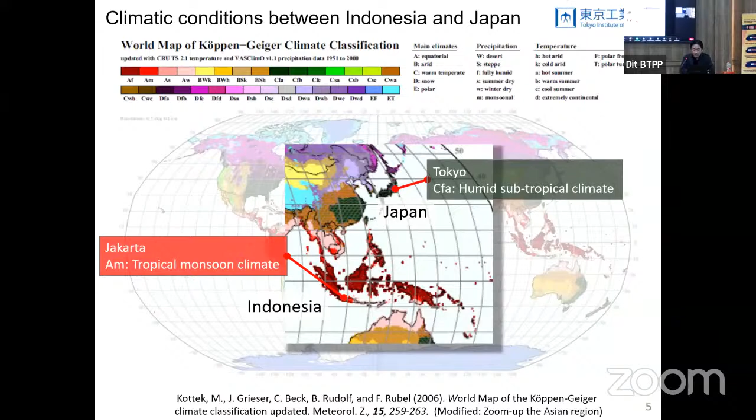This time I cannot compare many cities, so I'll simply compare Tokyo and Jakarta, very big mega cities. Jakarta is a tropical monsoon climate in this Köppen climate classification map, and Tokyo is a humid subtropical climate, which means it has very hot summers.

So I think we can greatly share information between Indonesia and Japan. This is the reason why I recently got involved in the project in Indonesia—how can we exchange data and knowledge between the cities and countries?

In view of the urban environment at very large scales, one of my research fields is remote sensing—how can we understand the actual condition of heat in the summer environment in cities and surroundings, using a satellite, aircraft, or sometimes a helicopter?

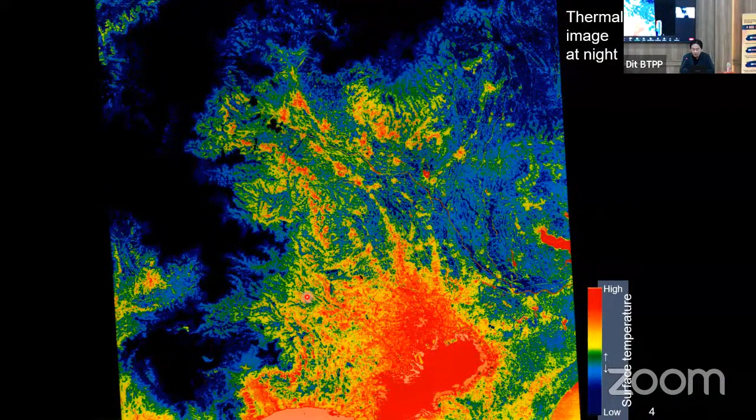We need to take care of such things. So one of the general ideas is how to consider such heat problems and how to mitigate such heat conditions, not only for the building itself, but also for the urban environment and surrounding buildings, by planting trees or something. The temperature of Tokyo is, of course, largely dependent on the regional climate.

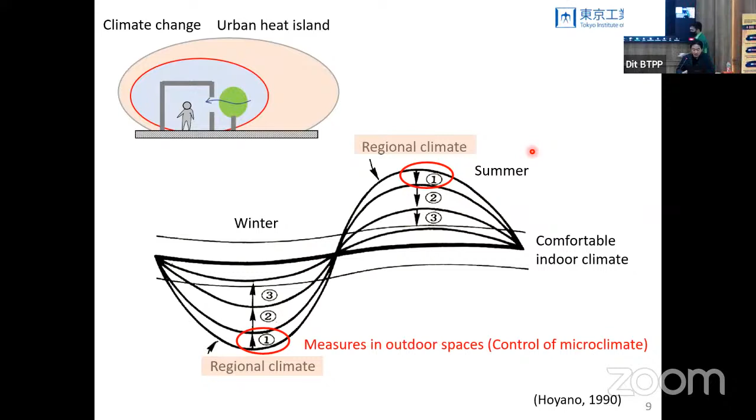Regional climate differs between cities - of course, Jakarta, Tokyo, or Jakarta and Bandung. Regional climates are largely different among cities. So sometimes it's hot and sometimes a bit cool. If there are very hot conditions or a hot summer like Tokyo or Jakarta, we need...

...to mitigate the heat in outdoor spaces like this one by planting trees or providing air flow, wind, or something. This is what we call control of microclimate. The surrounding environment is very important.

So I feel a very positive impression of Indonesian countries, especially in Bandung. They have many trees and they can mitigate the heat or bring nice air. This is what I feel is ideal - I think ideal. So yes, you can already achieve this one.

The second one is building performance, building design and performance. Next, you need to consider how you bring fresh air into the building inside, and how to keep the building performance for summer comfort inside buildings while also reducing energy use. Finally, you can control the indoor environment - temperature, humidity and such things - by mechanical equipment. So these steps 1 to 3 are very important.

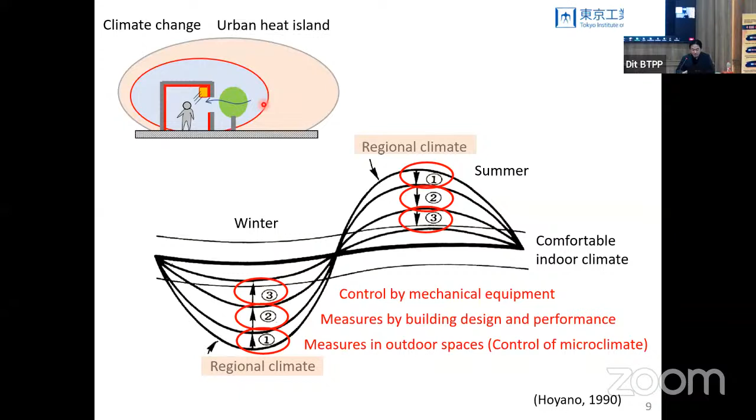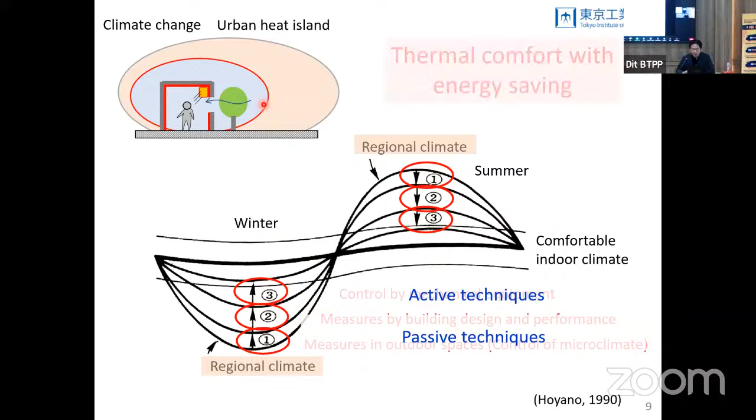The first two are called passive techniques - in hot seasons we call them passive cooling techniques. The third one is active techniques, using mechanical equipment like air conditioning systems. By considering steps 1 and 2 in the design processes, you can achieve thermal comfort with energy saving. This means please don't think of active techniques first - please consider these passive techniques first, then finally apply active techniques, and you can achieve less energy use.

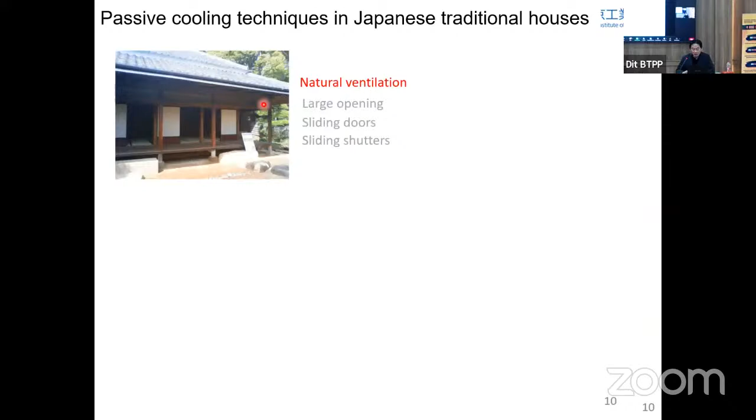Okay, so this is the Japanese case. Traditional Japanese houses were originally equipped with passive designs: natural ventilation, solar shading, and evaporative cooling while sprinkling water outside to provide coolness to the outside and inside. Also, thermal storage materials, for example the ground - the soil can store coolness. We call this thermal storage. Radiant cooling effect can also be achieved by earth floor and earth wall.

And finally, this is a very traditional Japanese lifestyle - we have a lifestyle and behavior that adapts to hot environments during summer seasons. Sometimes we forget such things, but yes, we have very nice traditions. I understand the Indonesian situation is almost similar - Indonesia has very nice traditions, nice buildings and nice environments. So yes, we need to respect such things.

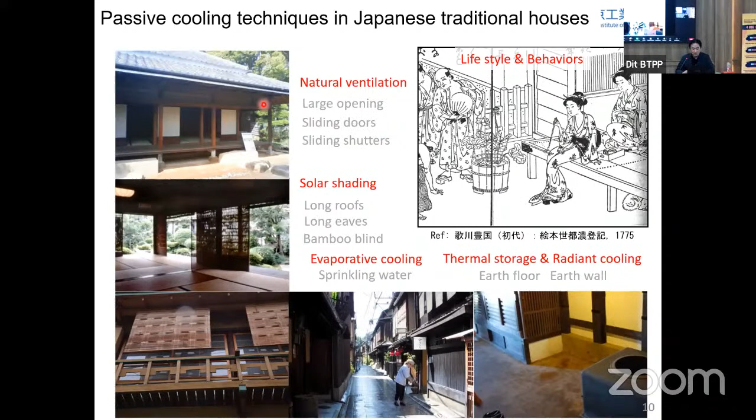But now we need to consider how we should act now and how we should act next. Not only thinking of former years, but also understanding the current situations and how we can achieve such passive designs in modern houses, contemporary houses, by combining them.

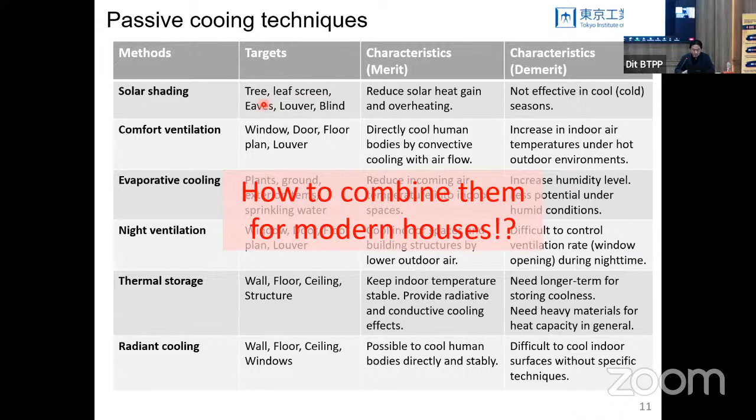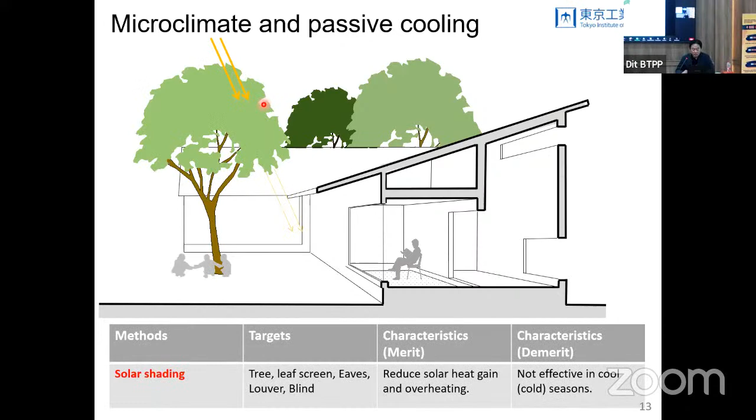But the important thing is the general idea and principles. Solar shading by trees is what we need to consider first. Shading is important in hot environments, along with bringing comfort air from outside. This is what we call comfort ventilation. Cross ventilation and stack ventilation can be applied even in hot environments.

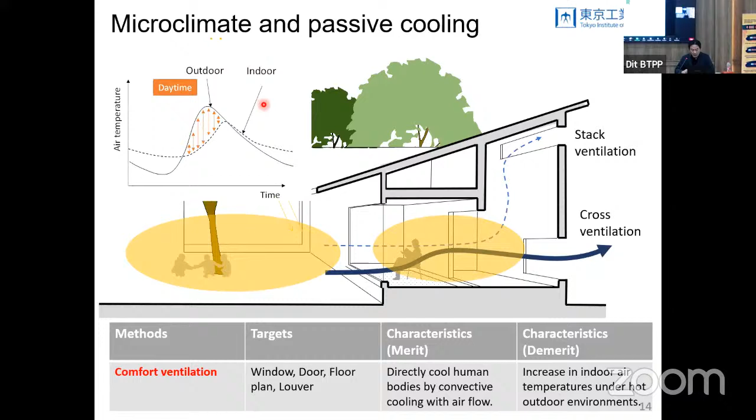If the outdoor temperature is over 30 or 35 degrees Celsius, we can mitigate such heat by evaporative cooling techniques. Water evaporation can remove heat through latent heat, and that can provide cool air into indoor spaces.

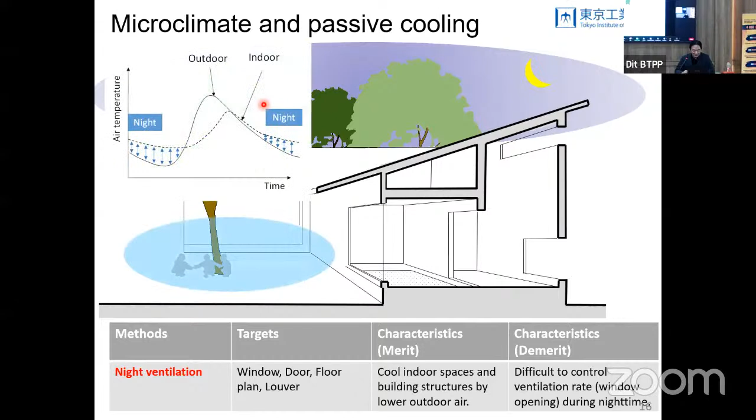During nighttime, we can enjoy very cool temperatures. So during nighttime, we can have much lower temperatures, and this lower temperature can be stored into the building structures, materials, and so on.

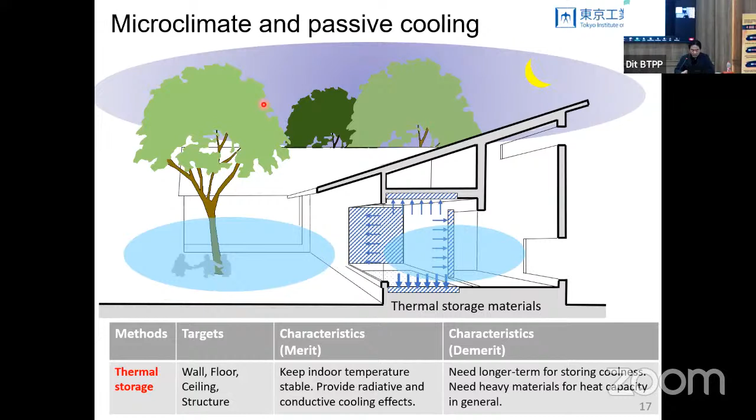This is what we call cool storage or night purge. If the building has such thermal storage performance, we can store this coolness for the next daytime. This means that if outdoor temperature becomes higher, we can close the windows and still feel the coolness, as long as thermal storage is in place.

So these are the very general ideas of what we need to consider, and the important points for thermal comfort with less energy by applying passive cooling designs.

Okay, so the next point is case studies in residential houses. How do we apply passive cooling techniques to Japanese traditional houses? This is a collaborative research project with the housing company Misawa Homes.

This is one of my collaboration partners in Japan. They also understand the Indonesian cases. For this case study, I have several examples where we collaborate with housing companies, but this is one of the very interesting situations.

The interesting situation is that this is one of the hottest cities in Japan. How to adapt to such a hot environment is a very big issue, and the local government considers these things. They say that although this is the hottest city, it's also one of the most comfortable cities. So being hot is not seen as a negative point - they changed their mindset to see it as a positive, asking how to mitigate it and attract people to the city.

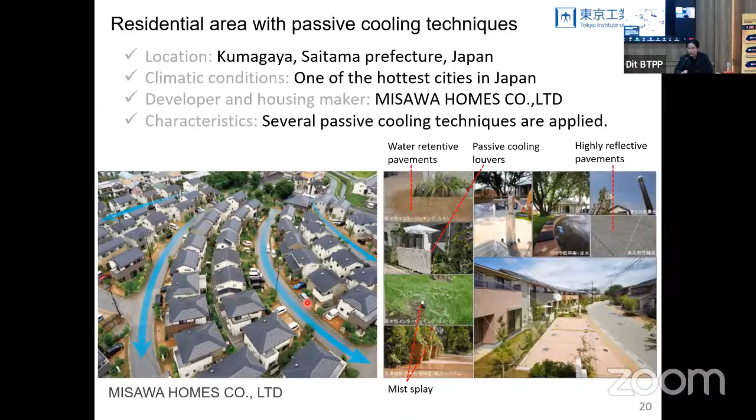But there are PV panels, photovoltaic power generation panels, on the rooftops. They are afraid that trees would cover the PV panels, so they select PVs for energy generation instead. But I think this is a very big issue - how to combine trees and PVs in residential houses, especially detached houses.

What we do is experiment at this house. Of course we discussed this during the design stages, but after they built these areas, we check how it works, how the performance can be achieved, and so on.

So what we do is compare situations with passive cooling techniques and without passive cooling techniques, and how it cools the space - veranda, terrace, or indoor spaces. Later I will explain the simulation optimization using simulations. The experiment and simulation are both very important - not only the experiment, but also the simulation. Both combined are quite important.

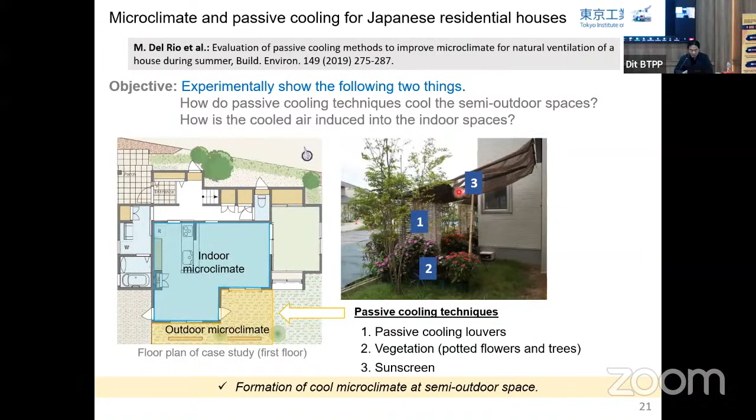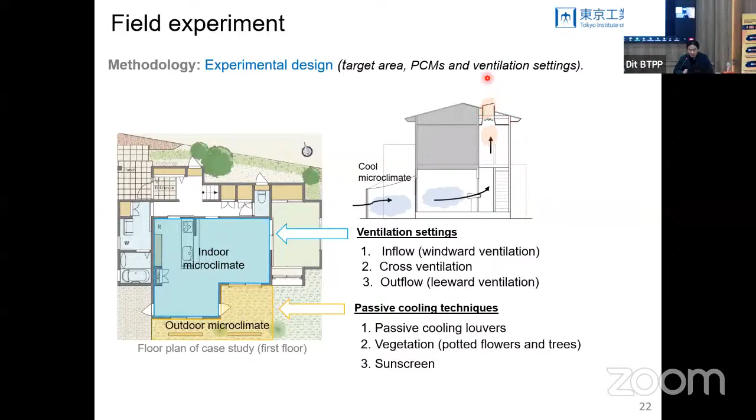First, we check the performance of these passive cooling techniques in one of these residential houses - there are passive cooling louvers, vegetation, and screens like this one. You can easily understand how outdoor cooled air comes into the indoor space, and how heated air is removed from the top windows like this one. You can see how the wind comes in, how it cools in the outdoor spaces, how it's induced into the indoor spaces, and how it's released through high side windows or top windows.

Okay, so this is passive cooling louvers developed by Misawa Homes, and we check the performance at this site. Yes, you can see this is dry

louvers without watering, and this is the wet louvers, wet PC louvers. So water drops from the top of these louvers, and then goes down by gravity, but it can smoothly spread the water on the louver surfaces. Then all surfaces are fully cooled.

You can see the temperature of these louvers is very close to wet bulb temperature. Wet bulb temperature is the minimum temperature that can be reached by evaporation, so reaching the wet bulb temperature is a very important point. And also this is the dry ones. You can see the very big temperature differences between them.

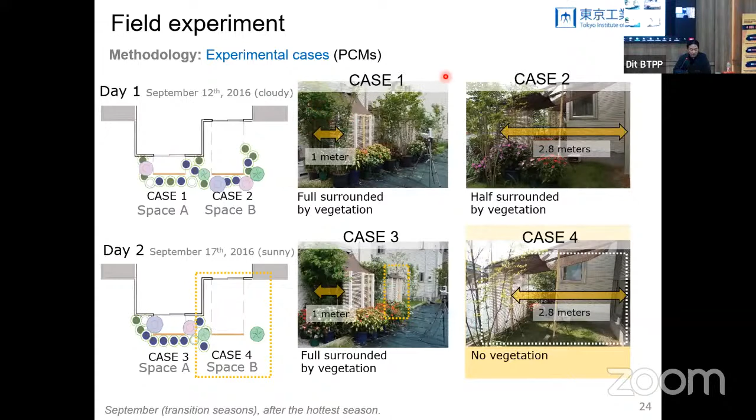We also check temperature in different cases, though I won't explain in detail this time. What we check is the difference in temperature of the terrace and terrace space with different louver positions - louver distance from the window to the louvers, like 1 meter and 2.8 meters - or the surrounding vegetation condition: fully surrounded by vegetation, half surrounded by vegetation, and no vegetation, to see how it changes. Case 1 and case 2 are cloudy days, and case 3 and case 4 are sunny days.

So you can see that when the louver is in a position very close to the window, the temperature of this terrace space is lowered by these passive cooling louvers. In the case surrounded by vegetation, temperature reduction can also be achieved - temperature is cooled in the semi-outdoor space.

But as you can see, the cooled air is very heavy, so it goes down and accumulates near ground level. This is important - cooled air goes down. This is the same situation. And this is a sunny day.

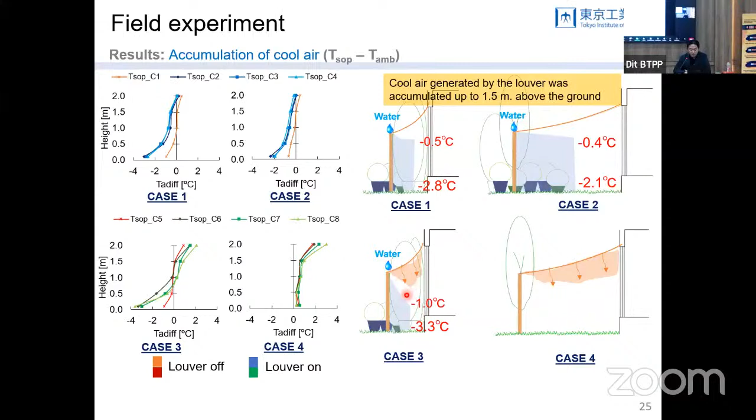So there is a screen to make shade, but there is heat coming to the screen, and it reduces the cooling effect - this means it heats this space. Also with long distance, heated by screen and no vegetation, this is the worst case - no cooling can be obtained here.

So it seems like very similar designs - louvers, vegetation and screens - but their performance is quite different. So we need to check such sensitive differences in the performance of the passive cooling effect.

We also check other situations like this one. If the louver and window distance is very close, cooled air can go into the indoor space. But if the louver and window position is far, around 2.8 meters, it doesn't reach because the cooled air goes down, and it's heated by screens - it's not good.

So we understand such design should affect the performance. So what is the best combination of them, and what is the best performance for indoor thermal comfort?

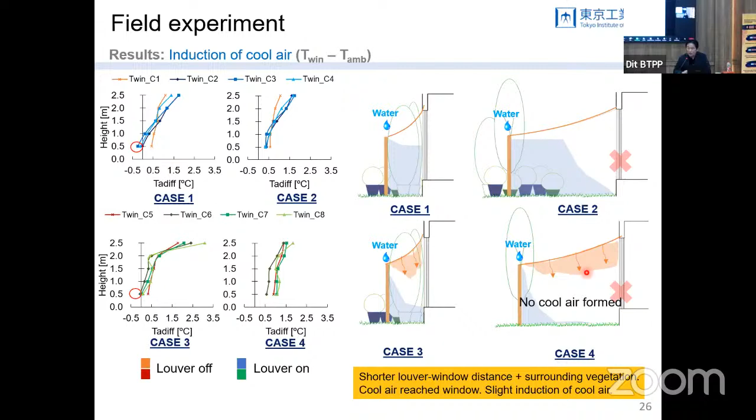There is a limitation in experiment and measurement - a limited number of sensors, limited cost and time-consuming processes. In that case, CFD computational simulation, like CFD simulation or energy simulation, is a very important technique that can

compensate for the limitation of the experiment. Also, the very powerful point of simulation is that it can be applied to the optimization process, optimization of designs. So if you change the design of the house or outdoor spaces and summer performance, you can check which one is the best, most influential, and which are less influential, and then get the best designs by using computer

simulations. So in this process, we apply the optimum combination of passive cooling techniques and passive cooling designs for buildings by using simulations,

like this one. And if you have knowledge of CFD simulations, in many cases CFD is focusing on either the outdoor space only or indoor space only. The indoor and outdoor are separated, completely separated. So this is a very general CFD simulation technique.

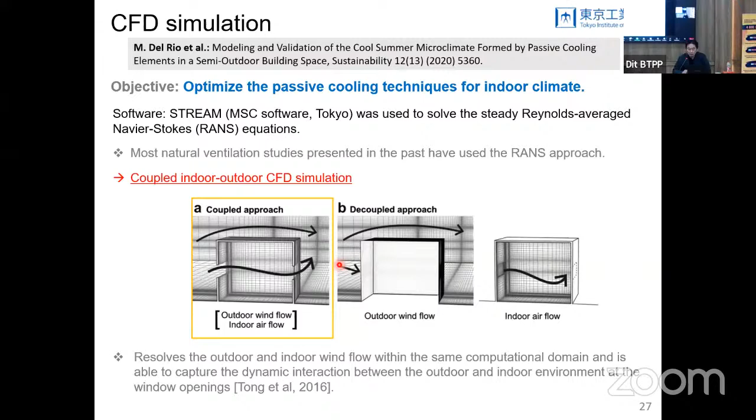indoor summer conditions and summer comfort. This coupled approach is what we apply this time. And these are the calculation conditions.

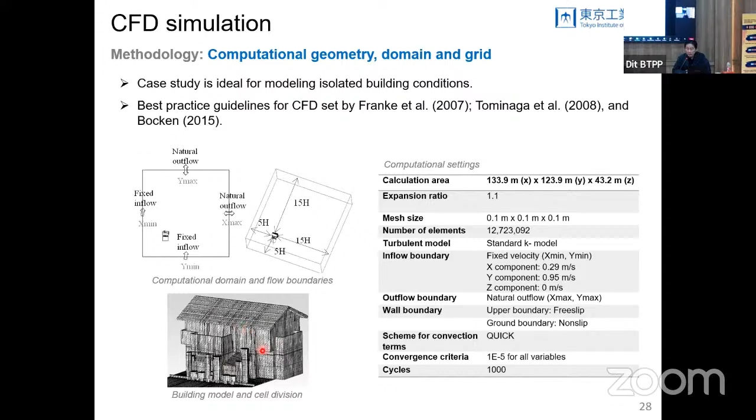I won't explain too much in detail, but we can have a very fine, very small grid to completely reproduce the design of the building and vegetation and so on in the computer. So, I think your question is, okay, is this simulation accurate?

Is simulation valid for checking such a summer performance of buildings? So this is what we call the validation process. Validation is checking whether this simulation is valid or not. So for the validation process, we can compare the measurement and simulations.

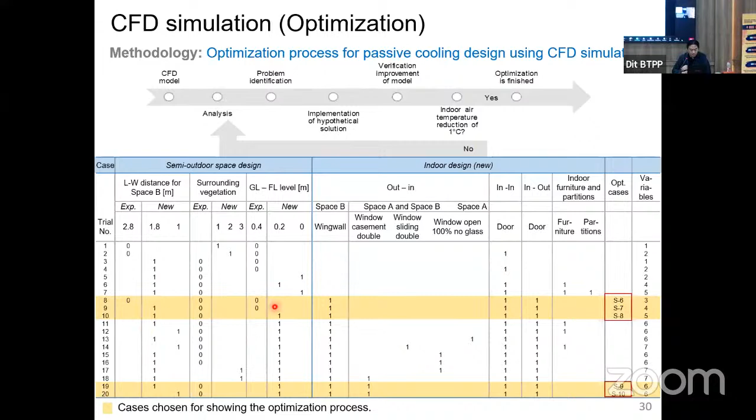And also the design of the building, the facade walls, the wing wall, and the type of windows are also quite influential, as I will explain later. Next, the window design and how the door of indoor opens or closes, such conditions, and indoor furniture and partition conditions, and so on. I will try - these are the 20 cases we tried, but today I will explain some of them. I think you can easily understand by checking these figures.

And the result - I'll show you the simulation result for each case. The first one is the original case, no change from the current design. So you can see this is the louvers and the vegetations, and here you can see the indoor spaces are a bit higher temperature this time, over 28 degrees Celsius.

I forgot to explain that this is not the midsummer season, but the late summer season. So I think outdoor temperature sometimes reaches 30 degrees or a bit less than 30 degrees. But we can see how the temperature can be reduced by passive cooling techniques. So in these seasons, it is quite important to apply passive cooling techniques.

So once the indoors are heated, they use the air conditioning system. Of course, in the very mid-summer season, we are largely dependent on air conditioning systems - this is the hottest cities. So in that case, air conditioning is needed, but in late summer season, the condition of indoor and outdoor spaces largely affects the selection of opening windows or using air conditioning. So it's very sensitive, and it's very important to apply passive cooling technique.

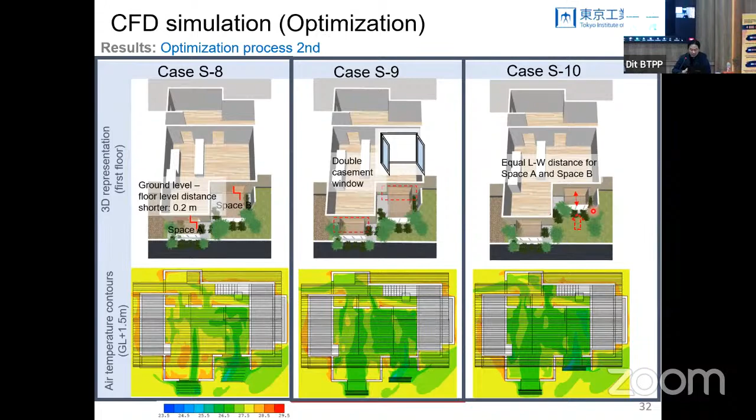So this is S10, and for S10 we also check the thermal comfort of indoor spaces, how people can achieve thermal comfort. As you can see, the indoor air temperature can be reduced by 1.2 to 1.6 degrees Celsius from the original case to the final case, so 1.2 to 1.6 degrees cooler.

But what is surprising is the thermal comfort reduction. The reduction of SET star is minus 2.5 degrees Celsius. The thermal comfort index SET star is the index showing how people feel coolness based on air temperature, humidity, wind speed, and radiation. Overall, people feel 2.5 degrees cooler than in the original case.

So it's easy to understand from these two cases. This is our final, optimum case for the passive cooling design. But I explained that this 1 meter louver distance may be too short for actual use of outdoor spaces, so this is a discussion with designers about which is best.

So you select either more performance on thermal environment and thermal comfort, or a wider outdoor space. If we show this result to residents, they can understand, oh, this position is okay, this position is not okay.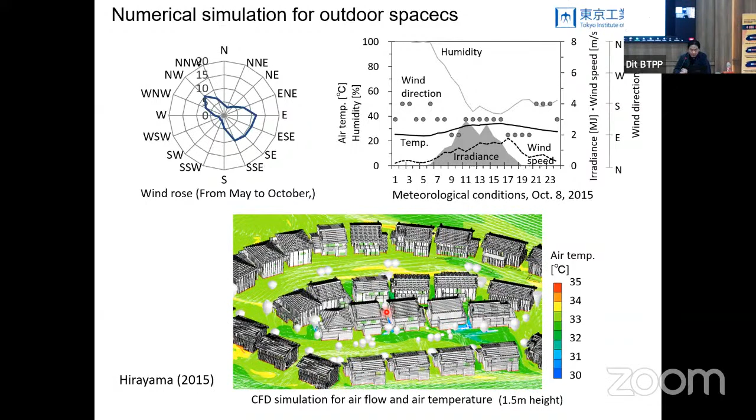And also in outdoor spaces we can check this. Later I will show this. I will explain the simulation tools for outdoor spaces, for example what kind of layout of passive cooling louvers provides more coolness in outdoor spaces, using such district scale, larger scale simulation tools, not only single buildings.

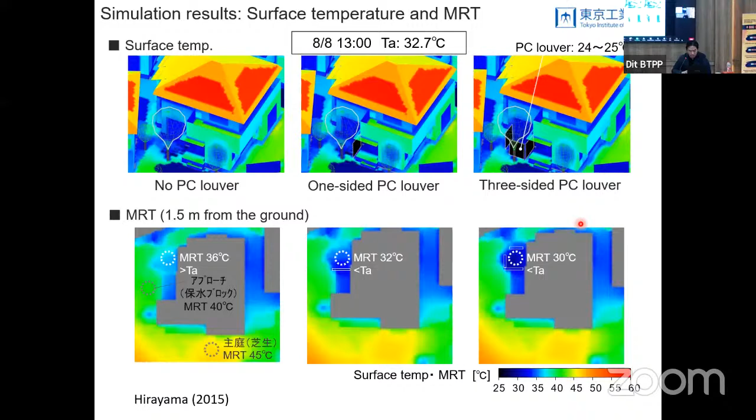The mean radiant temperature is one index for the radiation environment in summer. Summer radiation is very important for summer comfort—how it can be reduced by passive cooling louvers—and air temperature changes, and finally the summer comfort index, how it can be reduced by outdoor space designs and passive cooling techniques. This simulation is conducted for the summer season.

As you remember, in the hottest cities, outdoor space use is less and less due to hotter conditions outdoors. But by providing such passive cooling techniques, this SET star from 30 to 32.5 degrees Celsius is the summer acceptable range, not quite full summer comfort—people cannot feel fully comfortable, but this is also acceptable.

So by using numerical simulations, we can understand indoor summer comfort and building design, and also outdoor designs. This is what I titled this lecture: simulation-based design.

What I need to tell you is that the designers and housing makers selected this one-sided option. In view of summer performances, we think this is best, though it is too much enclosed for the residents, so one-sided is selected. This is a discussion point, so no problem, but we can provide such evidence and data.

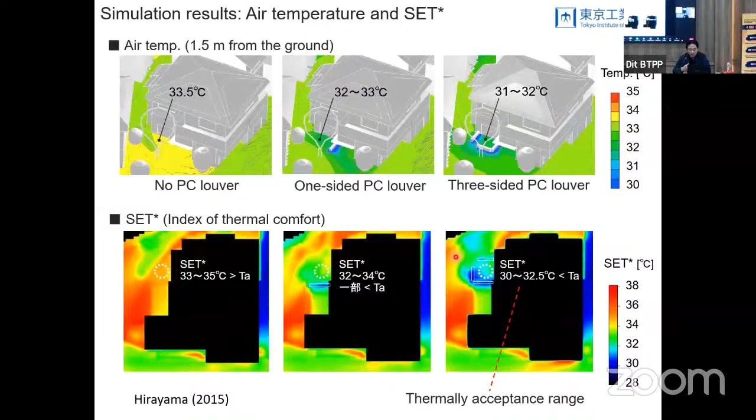Finally, I'd like to explain the larger scales, urban environment, urban summer environment. I think this is closer to governmental and official public works, how the building and urban spaces are designed.

Related to urban planning, urban design, and landscape design, we also developed a system that can check the summer performance and summer comfort of urban district scales by using 3D modeling techniques and simulations. Firstly, 3D modeling of urban districts and summer environment simulation will be discussed.

There are different types of simulation techniques, like surface temperature and radiation environment simulation. Surface temperature includes ground temperature, building wall temperature, and roof temperature. These are very important information for the summer comfort of outdoor spaces, whether heated, cooled, or shaded by trees, and how ground temperature affects human summer stress and comfort. Research shows that very high surface temperature areas mean very bad summer radiation conditions, causing heat stroke.

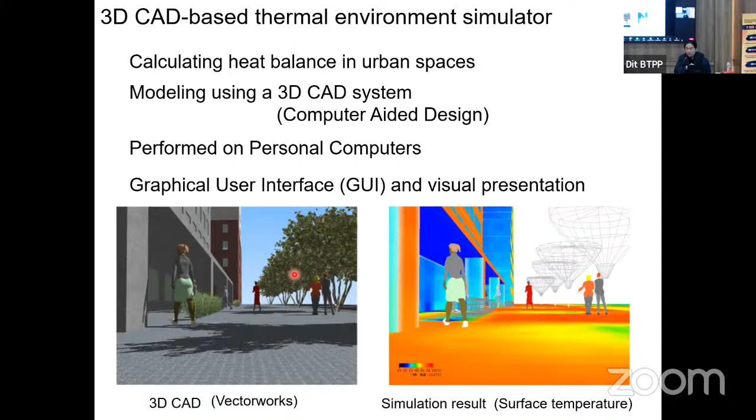For 3D modeling, what we do is apply 3D CAD modeling systems for buildings and urban spaces. By using 3D modeling, we can change the designs of buildings and materials, change the greens and green species, and simulate how this changes the thermal environment, especially surface temperature. This simulation can be performed on laptop computers, letting us understand how building and tree design changes surface temperature.

Computer-aided design, CAD, is very popular I think in Indonesia. By using computer-aided design, we can do this in the design stages and planning stages.

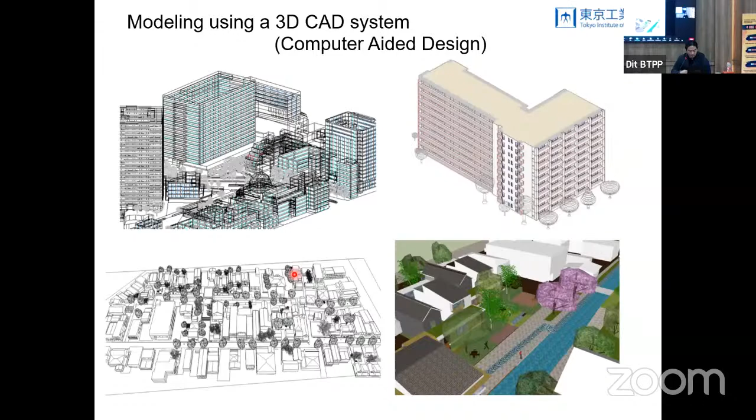As you can see, the buildings, walls, and roofs receive direct solar radiation and sky solar radiation, reflected solar radiation, and exchange long wave radiation with the sky and surroundings. These radiation exchanges can be totally simulated by these simulation models with 3D buildings.

We can extend this simulation to the district scale, like this one, which is for a middle-sized or maybe a bit smaller city, using 3D CAD models like this one.

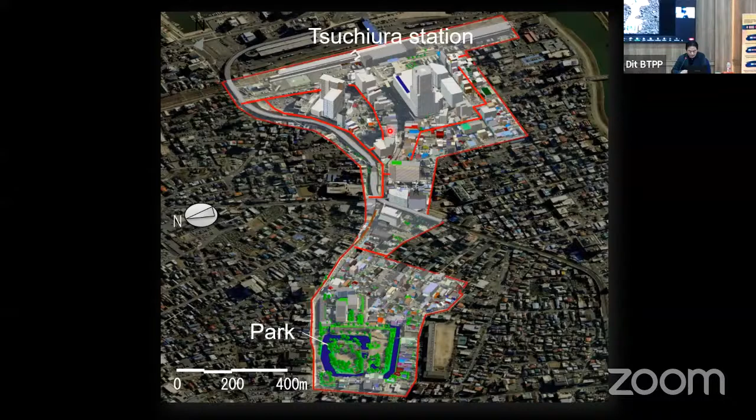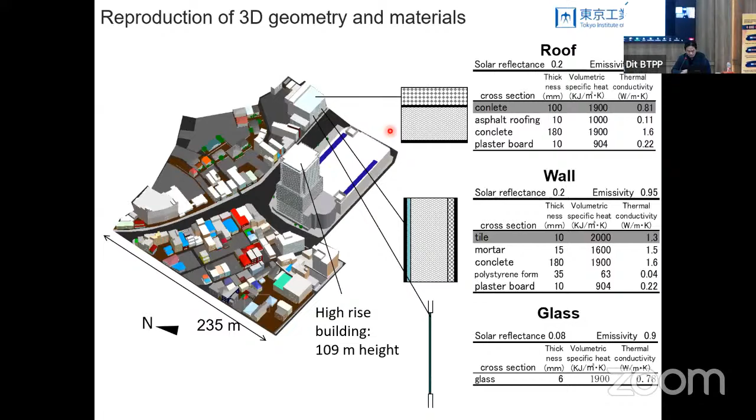We also put in the materials, which are very necessary to simulate building performance and thermal environment of urban spaces, including roof materials, wall materials, glass, and ground. These materials can be put into the simulation model, and then you can see the surface temperature of the urban district scales.

This applies to summer seasons and winter seasons. As you can see, there are high-rise buildings that provide shade to the surroundings, and differences in surface temperature between roof materials, and there are parks which provide shade and cool the surface temperature of the area. You can see the surface temperature differences and distributions using these simulation models.

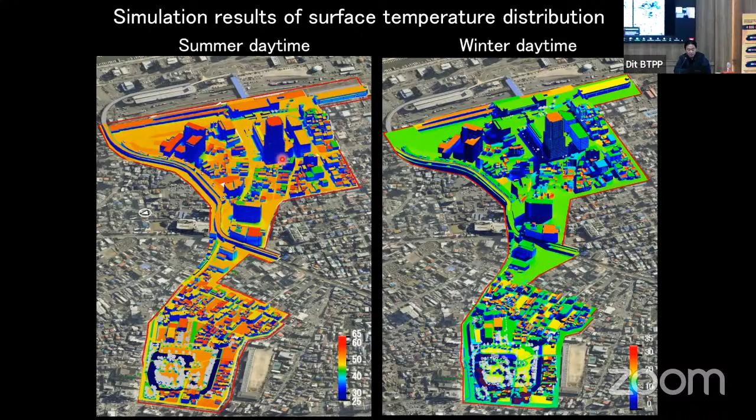Do you remember that? So for simulations, validation is important. So how do we validate this simulation result at district scales?

Yes, we use remote sensing data from an airplane. We fly the airplane with cameras, and check the surface temperature from the aircraft from 500 meters. Like this one, this is a city, this is the central city area, and also this is a land cover map.

Obtained by remote sensing. Remote sensing uses camera sensors that can completely check the thermal conditions and surface materials and so on from 500 meters.

Resolution means how detailed we can see each building and ground material, and it's around 0.6 meter resolution, so this is enough to check the details of ground levels and building shapes. We conducted the remote sensing observation for daytime and evening time.

So we compared remote sensing observation and numerical simulations. You can see the shade effect of buildings, the surface temperature and the difference in surface temperature between building types can be, not perfectly, but accurately reproduced.

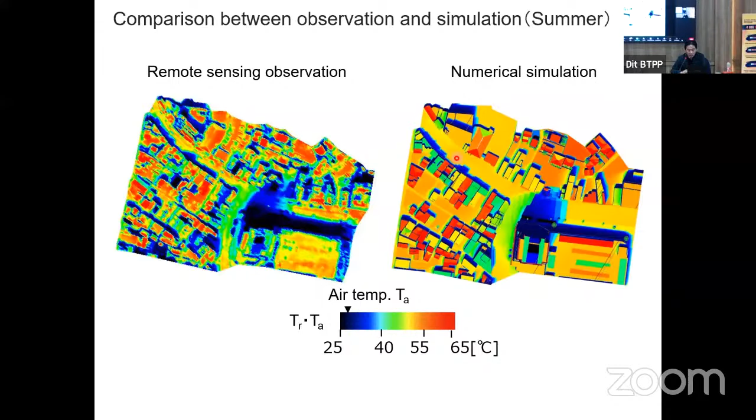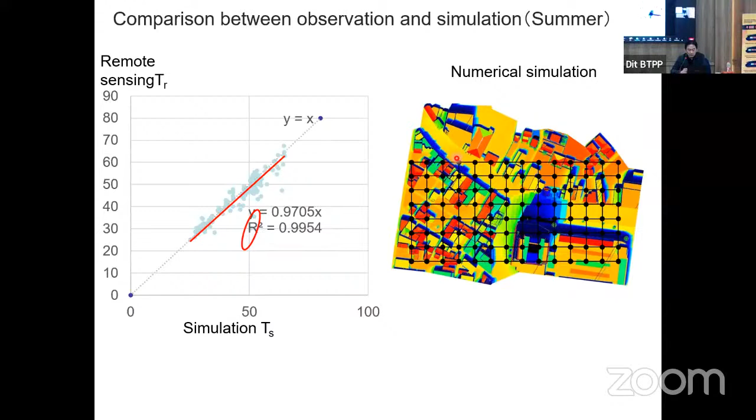We selected over 100 points to check the surface temperature between the remote sensing and the numerical simulations. You can see there is a very big correlation, a good correlation between them.

This is also the winter case. There is shade here from a high-rise building, so there is a very big shade. This simulation can also reproduce such a shading effect from big trees and tall buildings. We can see these are quite nice performance in the simulations.

There is a very good correlation between them. So we can validate the simulation result this way. We conducted this for summer and winter seasons to check the difference between the simulation and the actual conditions by remote sensing techniques.

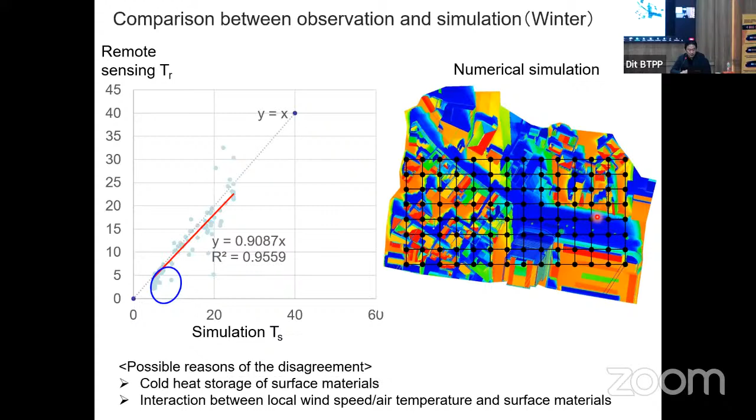So we can simulate the full area of an urban district, from central areas and parks to commercialized or residential areas. Now I pick up one of the residential areas, this one.

Now I pick up only here. This is the simulation result of the current situation. There are roofs and these are parking lots. This is a simulation result of the summer daytime around noon.

In hot seasons, air temperature is about 33 degrees Celsius, a very hot condition. As you can see, the surface temperature of the roofs of the residential houses is much higher, and also the asphalt pavement provided for parking lots is also higher.

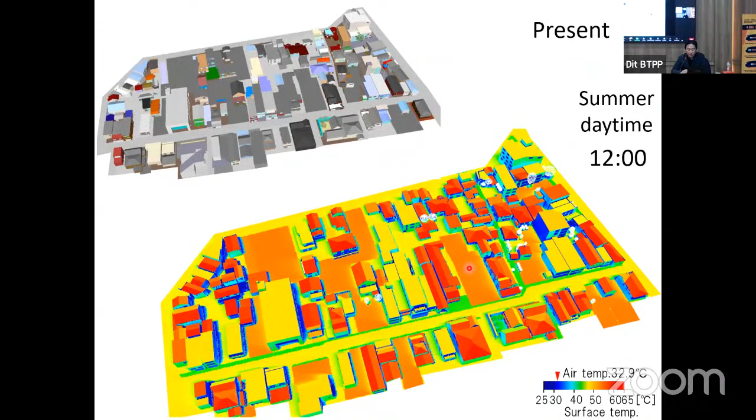So what is the powerful point here is that we can change the design of this urban district. For example, if you want to understand the effect of trees, or how to consider the effect of historical materials versus more modern materials, or something like that.

Like this channel, one of the historical heritages of this area, but now it originally covered this stream. The water stream is covered, but how would it change if you open this stream heritage?

How to apply more low environmental load, low energy buildings, how this works can be simulated. This is one of the images.

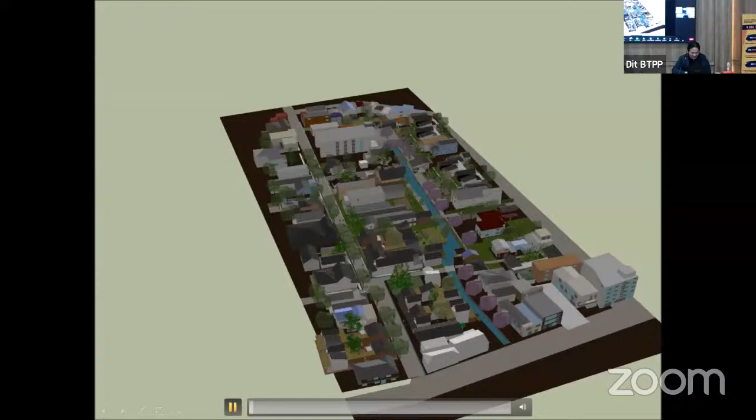I cannot see, I'm sorry, I cannot push the button. Okay, I'll skip this one. So if you change... this is just, now I can make it, okay. Now I stop the laser pointer. If I use the laser pointer I cannot push this button. Okay, now it's okay, now it's okay.

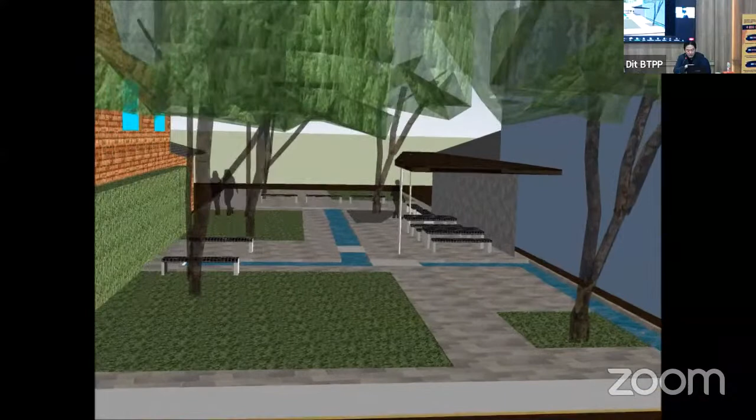So how it changes, how it happens when we produce a better design with trees and make the open space more comfortable, not parking lots, but providing more useful and comfortable outdoor open spaces with a channel stream, the water stream, and greens and so on.

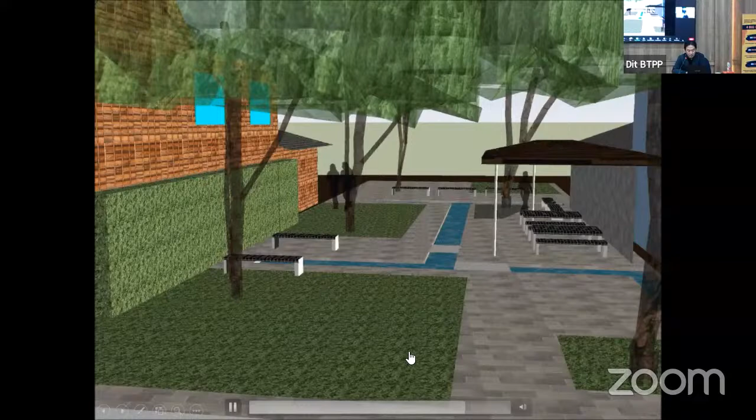By using 3D CAD systems, we can design and view the townscape and the design of buildings. The important thing is we can check the performance in terms of thermal environment and thermal comfort, how it changes, how it affects the summer environment.

If you achieve the future image in 2050, like this one, honestly, this is only an image, we haven't achieved this yet. But what I need to say is we can share the image of the future, what is changed, how to change these areas, how to keep and preserve the current heritage and current cultures and current urban areas, and what is preserved versus what is changed.

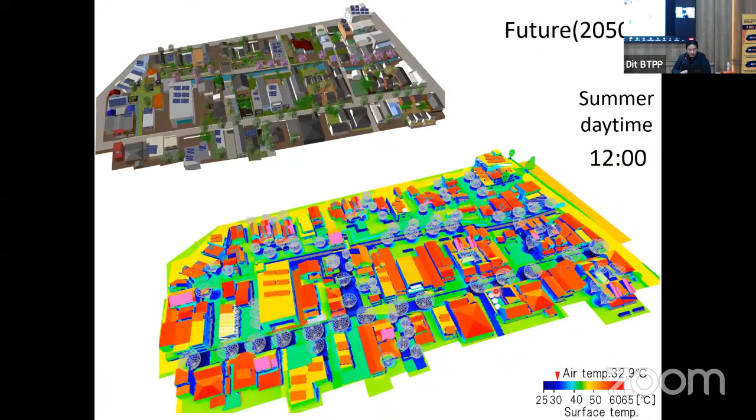And that thermal environment can also be simulated. For example, with parking lots currently - I don't deny parking lots are important, but this area has less and less people now, so too much parking is not needed. Most urban spaces can instead be provided for the comfort of people.

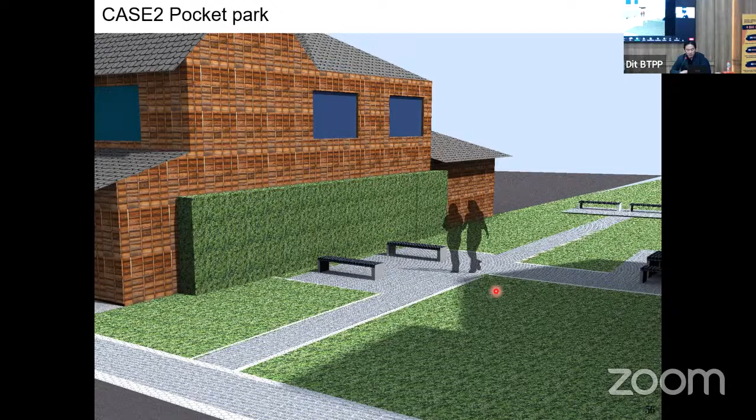This is just a very general pocket park in Japan, like this one, with grass but no big trees - big trees are not so popular in Japan compared to Indonesia. But I love big trees and the good shading and environment they provide for people.

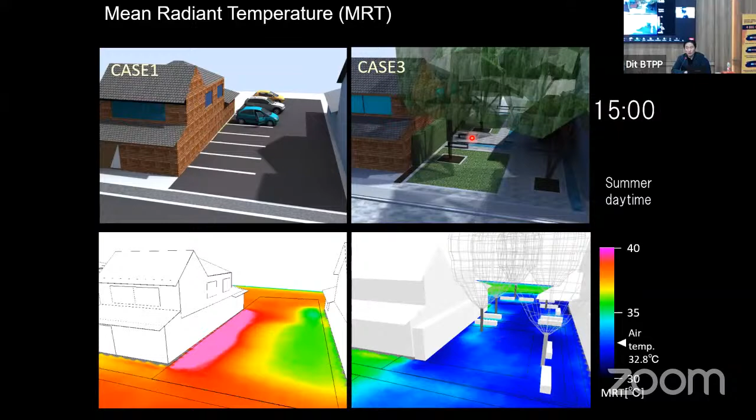With green design, you can provide areas like this and change the summer environment. This is the index of mean radiant temperature, a thermal radiation index, and we can calculate thermal comfort as I explained before. The thermal comfort can be dramatically changed from a hot environment to a cool one, not only by changing the design but also by changing the performance of the space.

PV panels can also be put on rooftops to provide energy to buildings. As I explained, the layout of PV panels and greens is a difficult problem. So we check how to place roofs, trees and PV panels so that the panels are not covered by greens, but instead shade is made for the open space and street space.

We also check the performance of the building - sorry, I forgot to put in one slide. This is a somewhat old building, so we check how changing the building materials, adding insulation, and changing building equipment like air conditioning, lighting, hot water supply, and kitchen appliances affects performance.

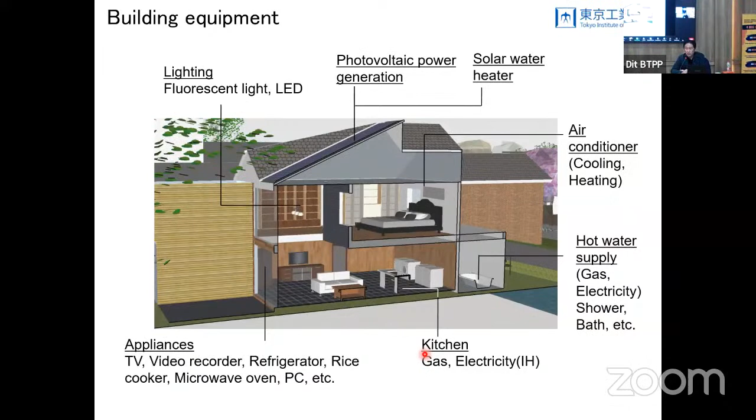Finally, we can check the effect of outdoor spaces, building performance, and building equipment on energy consumption, like this. We can achieve an 83% reduction by combining outdoor space design, building performance, and building equipment. This was all completed in simulations.

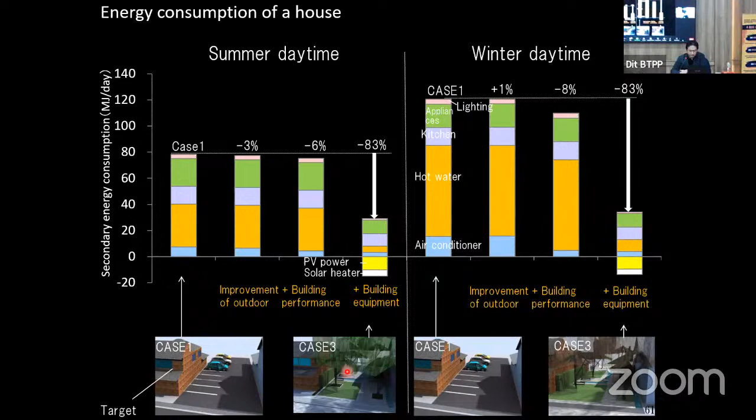So as you can understand, we can now connect building design and outdoor space design with building performance in view of comfort and energy. Time is a bit limited, though.

So the final part: I'll discuss a current project I've joined, an actual application of this kind of simulation to urban space design with thermal comfort. I already told Ariel-san about this project - Marunouchi Street Park is a very interesting and attractive project in Japan.

What is attractive is that this urban street park is not an original park - it's a street in normal days. But during a summer event, all cars are shut out, and it provides open space temporarily, like this. They put greens and lawns on the ground, benches and desks, to provide good open spaces.

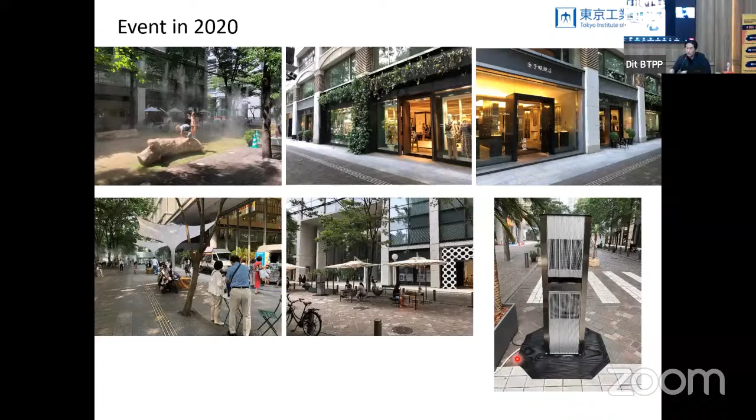What's surprising is this isn't in a suburban area but in the center of Tokyo, in front of Tokyo Station. There's a space like this for pedestrians, office workers, shoppers, and children to enjoy. This is Tokyo Station, and in front of it there's a street provided as a comfortable open space during summer season.

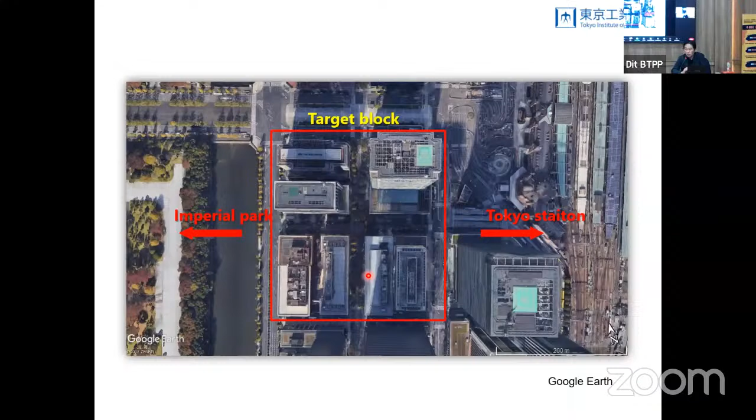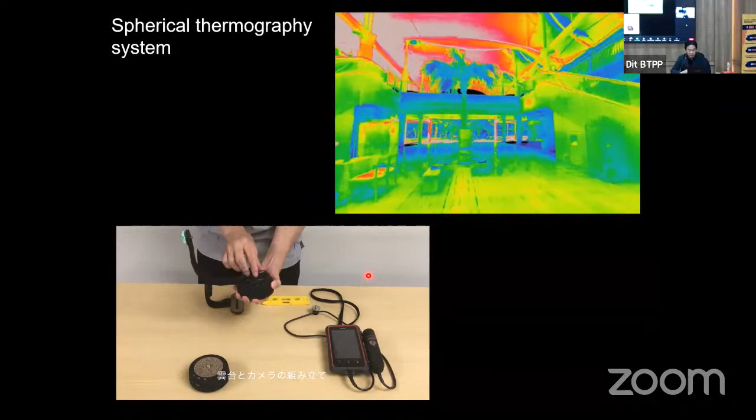We checked how this event, conducted during summer season, achieves summer comfort through passive cooling techniques, using measurement and simulation. I won't explain too much today given limited time, but we checked summer performance using this spherical thermography developed by our laboratory, which shows the summer performance of buildings and urban spaces in terms of surface temperatures.

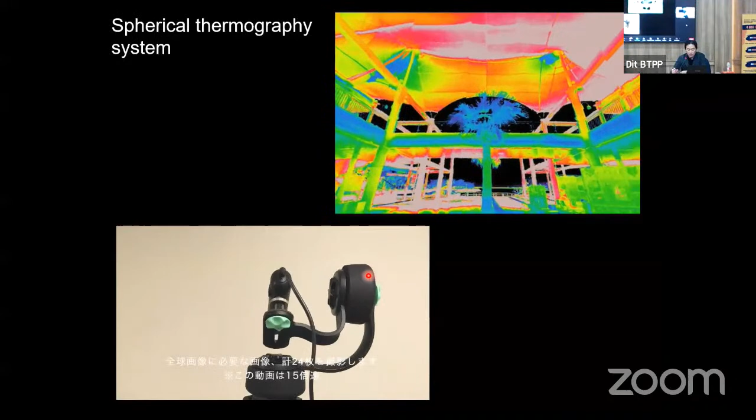As I explained before, the surface temperature is very important. The 360-degree surface temperature for this area can be captured by this system.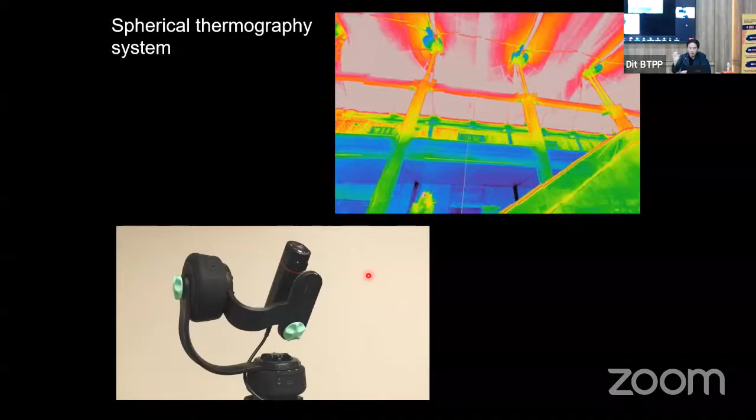We check the performance for summer conditions for each of the spaces like this one. This is only one parasol shading, but this is not enough, so this is not good. Next, we remove this one and try the next change. I'm not the designer and I'm not the planner, so the decision is theirs, but we can provide the data. This is not good, so they don't select this one.

Trees are okay. The surface temperature is lower and can provide coolness. This is the best point - very good tree crowns and canopies, and also lawn grasses, or sometimes water retaining pavement with evaporated material. We can create coolness here.

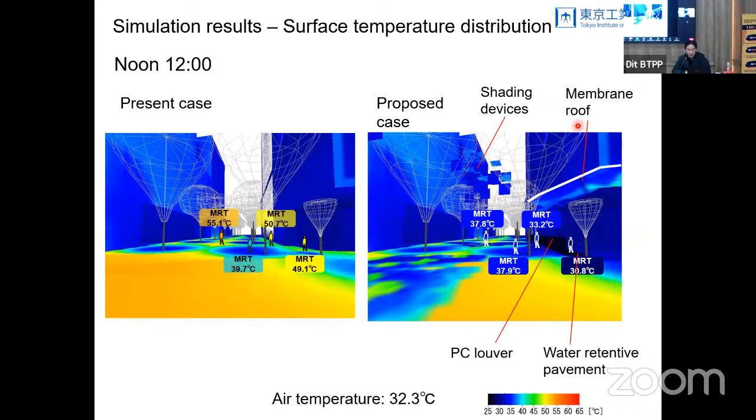Also, with simulations we can check the effect of different designs and different passive cooling items on the surface temperature and summer comfort. As I explained, passive cooling louvers, water retentive pavement, shading devices, or membrane roofs. Shading devices - how they work on wind speed, air temperature, mean radiant temperature, surface temperature, standard new effective temperature, and summer comfort.

This is the present case, and this is applying the passive cooling techniques as I explained. By applying them, we can achieve summer comfort here. This is not very stressful for people, and they can achieve summer comfort even in very hot summer seasons.

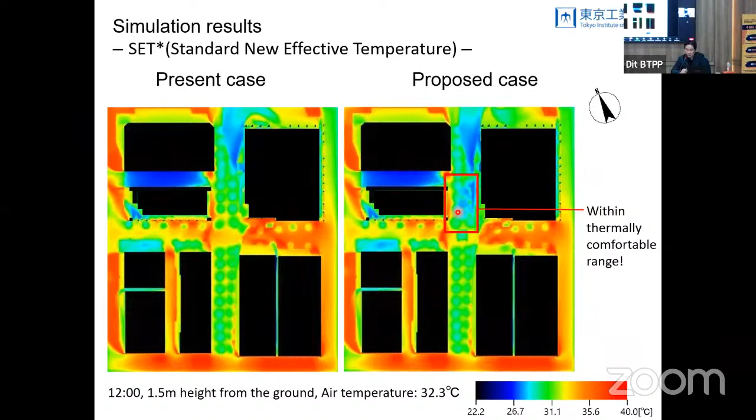Because the Japanese summer is very hot and getting hotter. This year, the surface air temperature is about over 35 degrees Celsius at maximum. This is very hot conditions, but people can use this space with comfort.

The management company of this area and local government decided to increase the furniture and desks or something to provide good spaces because people can feel coolness. This is enough for their resting, working, playing ping pong, or even good sleep.

This is not traditional in Japan - traditionally Japanese people don't use outdoor spaces too much. But now we can use this space because after the pandemic with Corona, we need to use more outdoor open spaces with fresh air. We can release the stress from very hard working. So at this time, this kind of space is important.

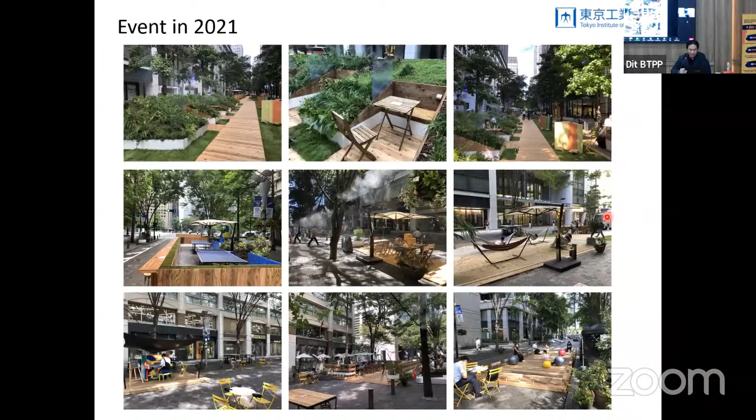Finally, we check by questionnaire how people feel comfort or coolness in the space. During hot seasons, people can feel cool and slightly cool in this space, and also slightly comfortable. We made a questionnaire here, and 80% of people can feel the coolness.

Over 80% of people who use this space can feel comfortable, so this is very important. If you provide such furniture or desks across the street and provide the spaces, but if they don't use the space, it's too much cost, effort, and time consuming. So we need to decide whether this is okay or not - for people using the space, yes, this is okay.

So we can use this space and utilize it more. The design changes year by year and gets better and better now.

I think this is the final slide, for numerical simulations. Now the Japanese government also considers the application of numerical simulation - how to evaluate energy, structure, or transportation systems based on 3D models. This is a very attractive project now, provided by the Japanese government, Ministry of Land, Infrastructure, Transport and Tourism. This is a total 3D model of Japan, and this is open data that we can use.

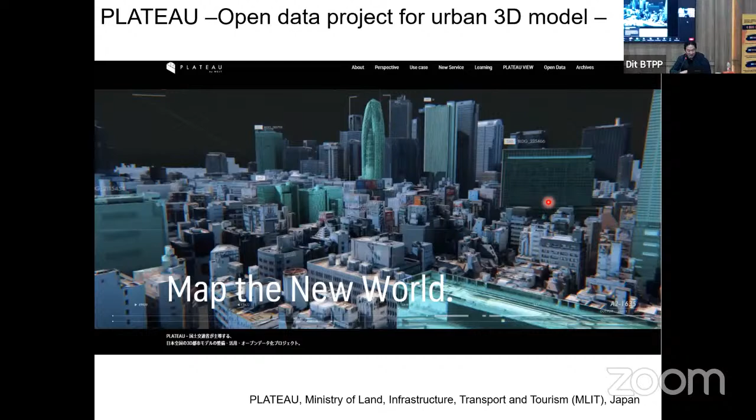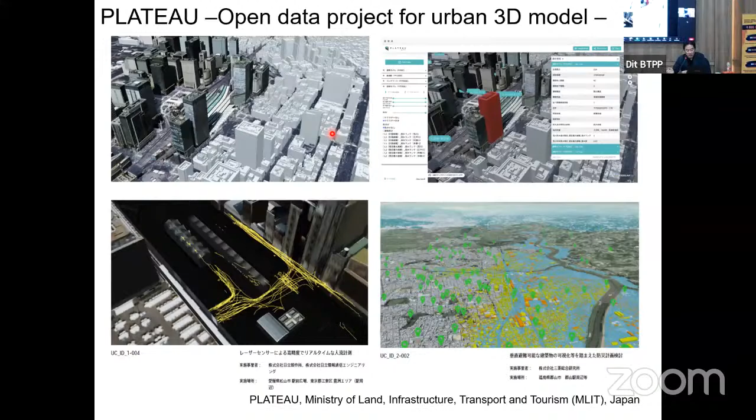Honestly, previously we made 3D models of areas by ourselves, and it took my students very hard work to make these models. But that's not needed now, because they originally provide a totally 3D model of urban centers like Tokyo, or suburban areas, or other cities like this one, which we can utilize for simulation models.

Now we apply these open 3D models to the simulations, but right now it's a very simple model we apply. The Japanese government is increasing building design detail levels like this - LOD 1 is a very simple model, and LOD 4 is a very detailed model.

So if they can provide more detailed data, yes, we can use them for simulation, not only the surface thermal conditions and thermal environment, but also energy simulations. I think in the near future we can do this.

Okay, I'll skip these since time is over. I think this is 60 minutes for my presentation. So today I talked about these topics, which are from one of my research projects, trying to collaborate with companies and local and national government to achieve thermal comfort and less energy use through simulations.

This is still in progress now. We can't yet achieve 100% in the practical phase—about 50% is research phase and 50% is practical phase. So how to achieve this kind of simulation-based design in practical situations, collaborating with designers, local government people, and stakeholders, is I think a very important next step. I want to discuss this with you as well.

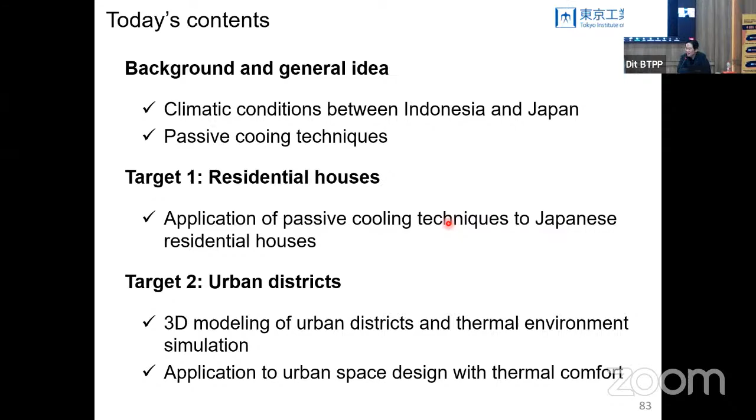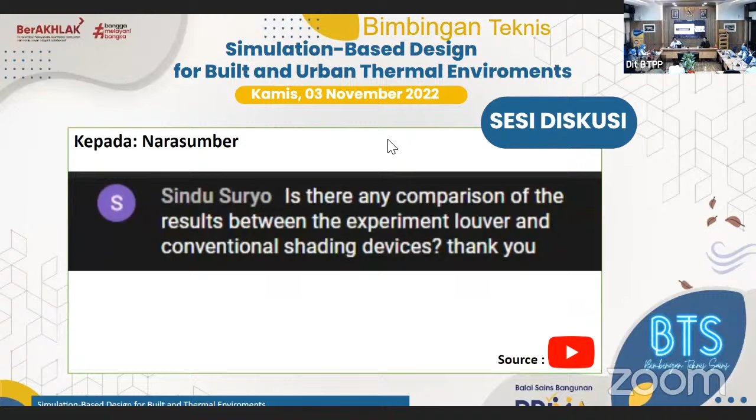Okay, so we have five questions: from Inat, Fani, Neti. But from Neti, sorry, I forgot to interpret, she asked about in your simulation you only present about the pivot windows. She asked: do you have any other research to investigate other types of windows? Because as you may know, this type of window takes so much space when open or closed. But with minimized space, still improving the indoor thermal environment. Thank you.

So first question is from Inat-san about the validation process, what we change if there is a difference between the simulation and the experiment. Yes, of course we accurately measure the data of indoor temperature and humidity or wind speed by measurement, so we rely on the data of the experiment. If there is a difference between them, we first check some boundary conditions or parameters of the simulation that may be a bit different, so we change such parameters and settings for the boundary condition. If the result is okay, this setting is validated. But if there is some discrepancy between them, we go back to the experiment, because there may be some errors or uncertain factors in the experiment, and then we check both. So this is the fundamental process: first we check the simulation settings, then we check the measurement. But this is my way, I'm not sure this is the general one, but we do such things.